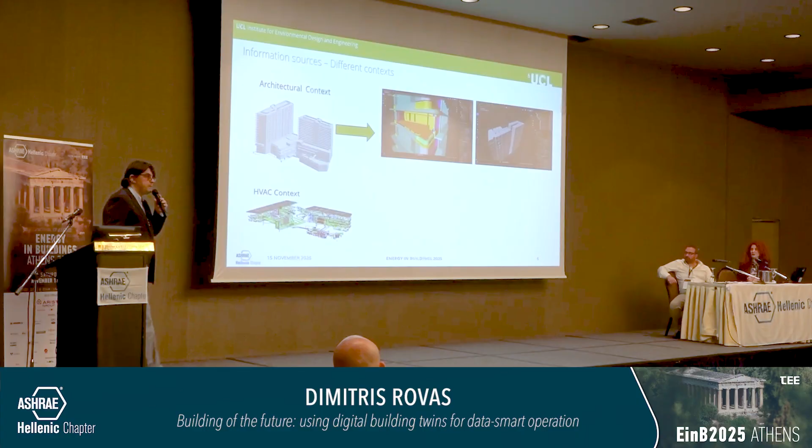If we look at the MEP side of things, a different perspective around the building, the heating and cooling context, this is part of that federated BIM model, and you can infer the complexity. Just looking at the bottom part, you can tell there's much more complexity, and all that complexity has to do with the contextual knowledge around how that building is working and operating.

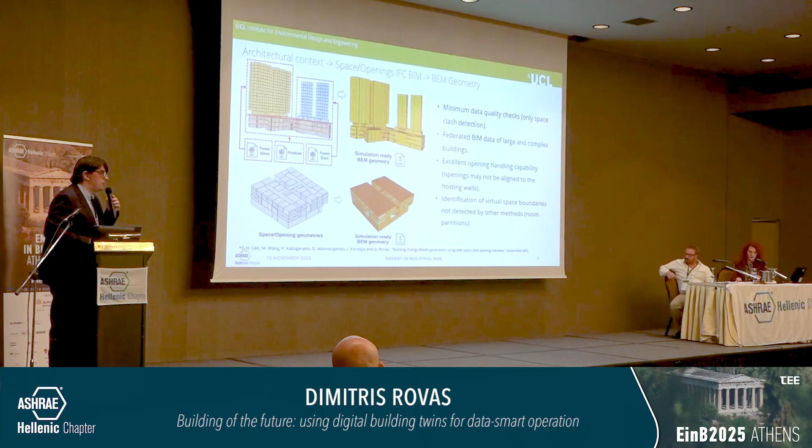In the real world, we always get this data, whether it's 2D drawings or building information models in more modern cases, or other types of data, and all this data are always going to be problematic. So what we have been working on are algorithms and tools that are robust to such uncertainties.

One proverbial case is around how we can generate and understand energy performance. The way we do that is we set up energy models. In early or later design stages, for example, there's an ASHRAE standard 209 that talks about different design stages, and there's a lot of discussion around how we use energy modeling. We need to create those models that are not correct, but represent our understanding and support not actual numbers, but a discussion and decision around how things are.

So the reason we create these artifacts is not models for the sake of models, but rather to help us understand how specific design decisions are made and what impact they have, and then drive the discussion between the different disciplines as a way of exploring that space and delivering solutions that are fit for purpose. So what we've been working on is around that question.

Can we accelerate that process and facilitate that discussion? Can we support fast engineering and re-engineering so that you can get responses around how your building is operating or how a specific design decision is going to be made? So we've been working on algorithms that automate that process, and the case of an energy model is one example, looking at the geometry.

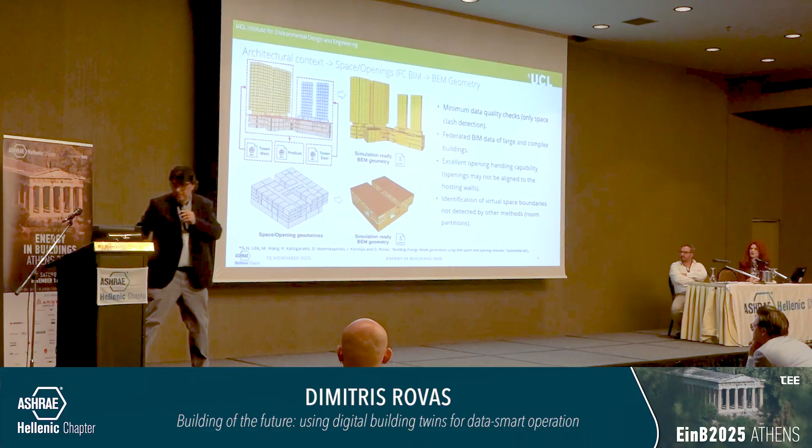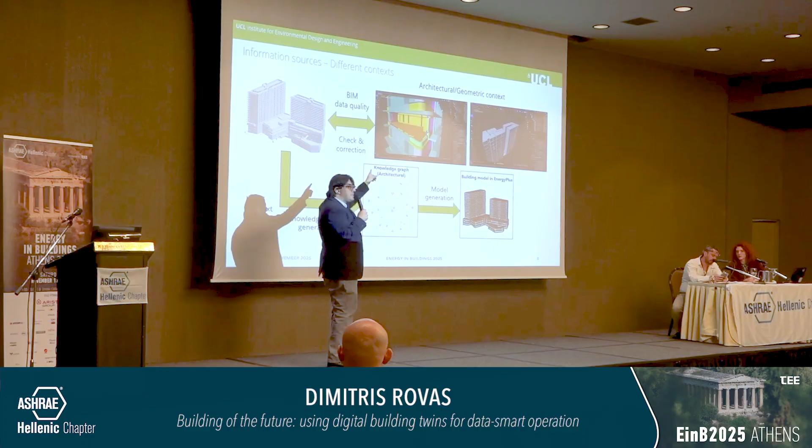Now, what becomes quite interesting in this case, and I'd argue in many cases, is that when we look at understanding energy flows between buildings, this is very much a topological issue. We need to know this space, what space is connected below, above, or next to us. And when we have something like a graph representation, I'll explain and show examples in a bit, it allows us to capture that complexity in a robust way.

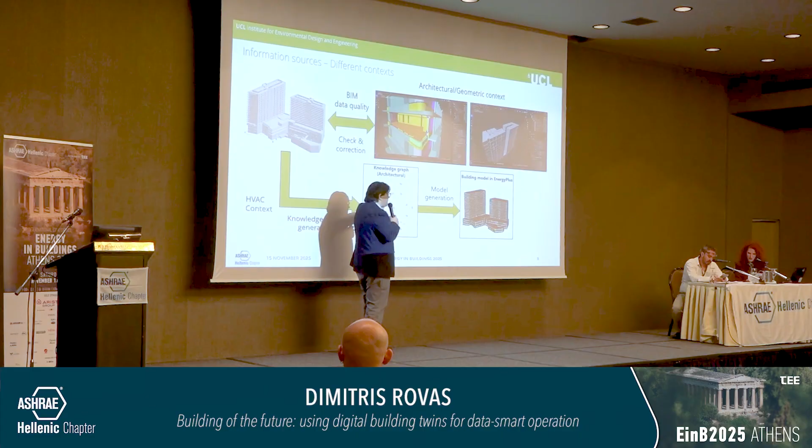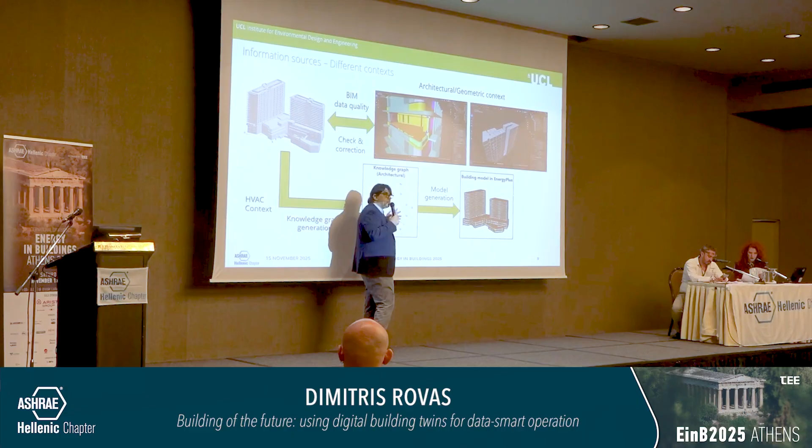So what I'm introducing here is some sort of representation, a knowledge graph, an ontology, and we're going to get to that, which allows us to capture how that building is connected. This is the fundamental information required so that we can generate energy models.

A second bit, which is equally important and relevant, and again academic work with quite a lot of implications, is how we can look at the different perspective. The heating and cooling side of things is a different world, but talking about the same context, the actual building itself, and how we can bring that information under the same umbrella to understand how we serve spaces and so on.

So what we have been looking at is developing different algorithms that automate the process from different inputs. In this particular case, this algorithm is taking building information modeling data, and then generating that connectivity that allows us to tell which terminal unit is connected and how connected to other systems. And then we can generate some sort of representation around that connectivity.

And the important bit is that representation is going to be very different for this building compared to the next one, but the structure of that representation can be exactly the same. So if we manage to do it for one building with a fixed structure, then we can do that for every building with any structure.

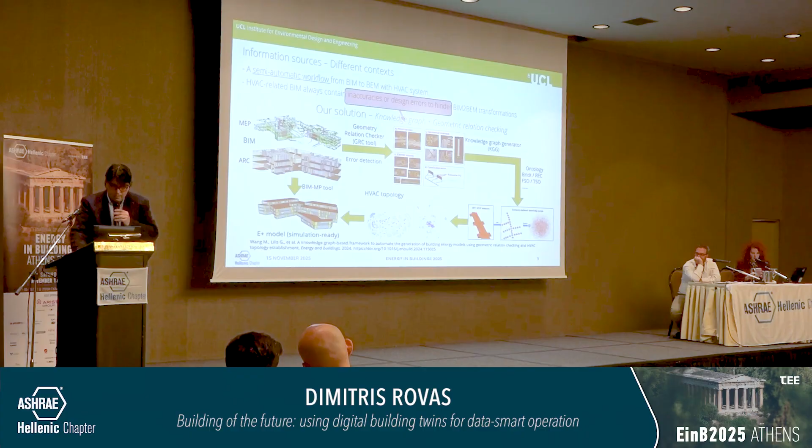So to highlight this, here's one example of that workflow, where we started from different building information models. It was a federated model, Bartlett, and then managed to generate automatically or semi-automatically the E+ model.

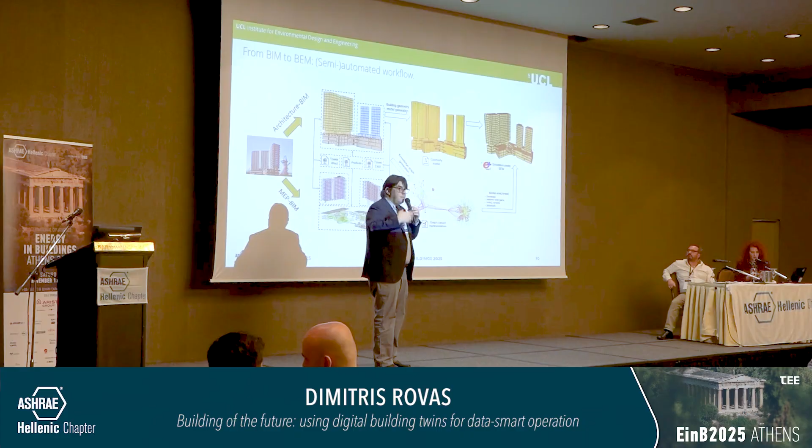You can run that model, give some results back to the user, and then if the user decides to change one parameter, operation or otherwise, you can regenerate that automatically, and there's not a lot of effort into doing that process, which usually takes quite a lot of time. You have very fast and very quick responses to that. So this is trying to automate that aspect.

But I think where it becomes much more important is when we go to operation, when we actually have data coming from different aspects. And then we have different stakeholders, and they have different requirements, different needs, and we need to serve their purpose. So what I've chosen to focus on is one of them.

And actually what I'm going to be talking about, we can change the context and the stakeholder, and we can demonstrate the same ideas, as was raised before, and understand that while they are looking at the building from their perspective, they have the same needs of understanding structures and using the data.

So these are ideas of questions that might be asked from the facility managers, which is the UCL Estates team. It is questions about resource utilization, it is about compliance, it is about resilience, it is about comfort, it is about energy use, it is about reporting KPIs for strategic decision making, and they have to work with different types of data: environmental data, access and occupancy data, utility data, and so on and so forth.

So the question is, how can we do that? And the way it happens now, there's a lot of value associated with data, so we didn't install 3,000 or 4,000 sensors in this building for nothing. But then accessing that information and finding useful information, getting signal from all that noise becomes very tricky, especially for people who are not trained to be able to do that.

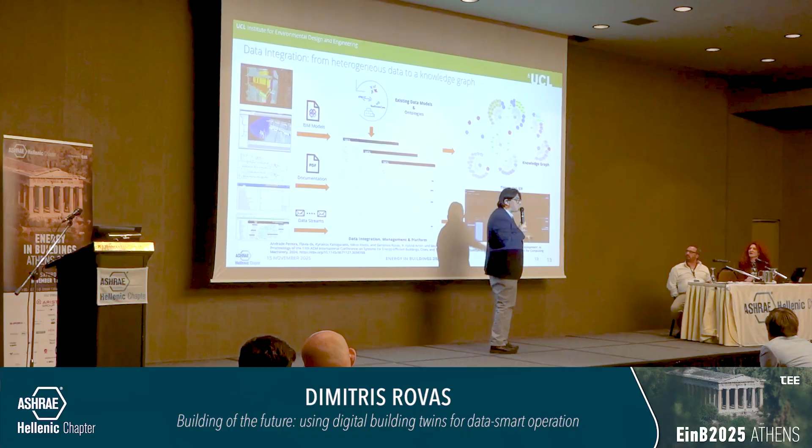And what our platform can do is generate some sort of representation, which is that knowledge graph that is based on ontology, an example of what was mentioned before. And that knowledge graph captures all the essential parts of what the building is about in a way that is queryable and discoverable by the different stakeholders and by different analytics.

So we can be running those processes, and then we can be collecting the data from the different assets. This can be a BMS system, this can be IoT sensors, this can be weather stations, this can be APIs, web services, whatever. So we have a very generic driver architecture that allows us to get this data and access this data, and then cross-reference those two things so that we can support decision making.

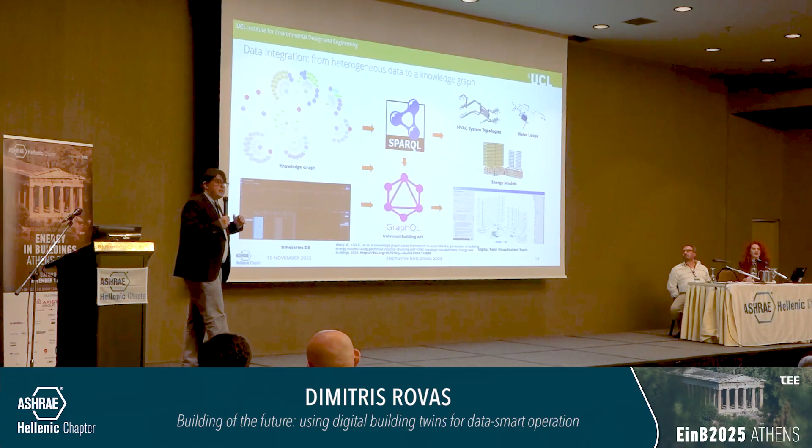The way that's done, and the way it should be done, is in a universal way. So that knowledge graph, that ontology, supports a representation that has a mutable structure, or a different structure. And so the way we should be able to expose those data to the outside world, which can be analytics, which can be AI, which can be users, is through a standard interface.

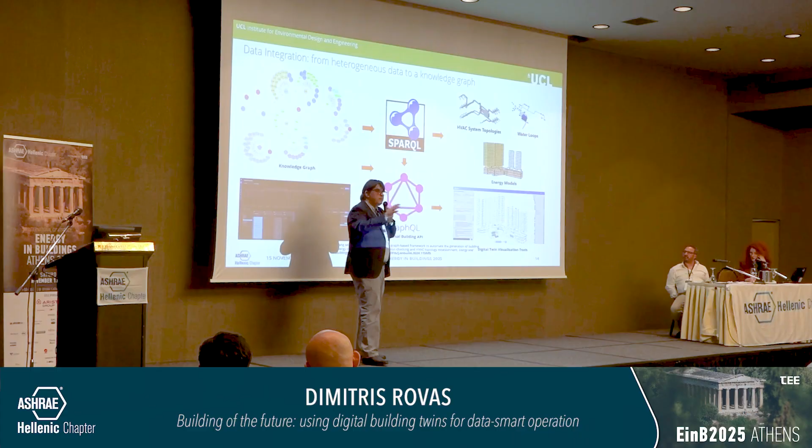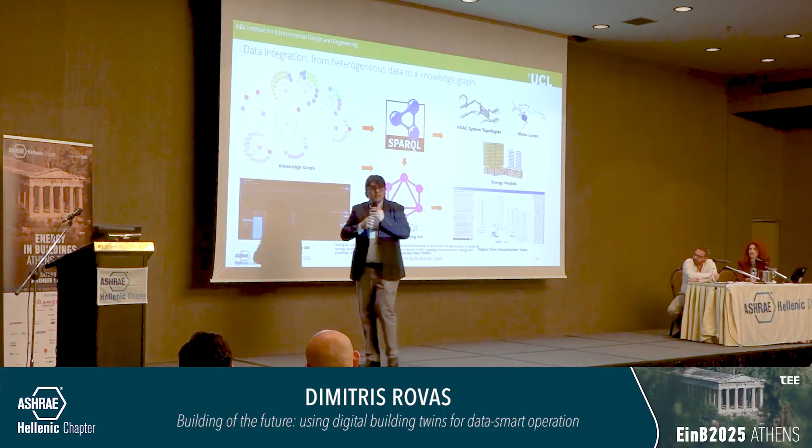I'm not going to go into the computer science bits, but using something called GraphQL, we can expose this information. You don't really need to know what building you're talking about. You can explore and ask questions around your data, and discover what the structure of the data is based on your ontology, and then access the relevant data using that API without understanding which building you're working on. And that is very important so as to deliver and separate and develop services.

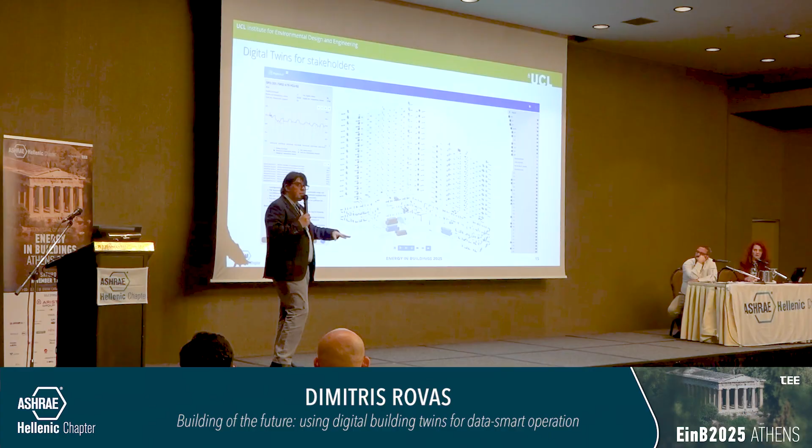So this is an example, and I'm going to show you - this is an academic example, but it's exactly the same idea as was mentioned before. The visualization context comes last and is not so important. It is important from a user perspective, but it is less important than the underlying data representation, which is based on these properties. So here's an example.

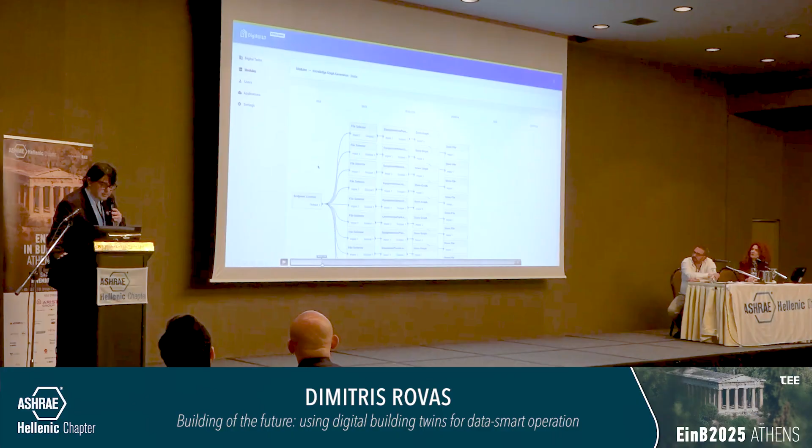So this is kind of how our platform looks, and it supports different data integration. But then this is what comes out - this is the graph of that building. There's a building, there's a level, there's a floor, there are spaces, there's a function unit, that function unit has points, and this structure is then fixed.

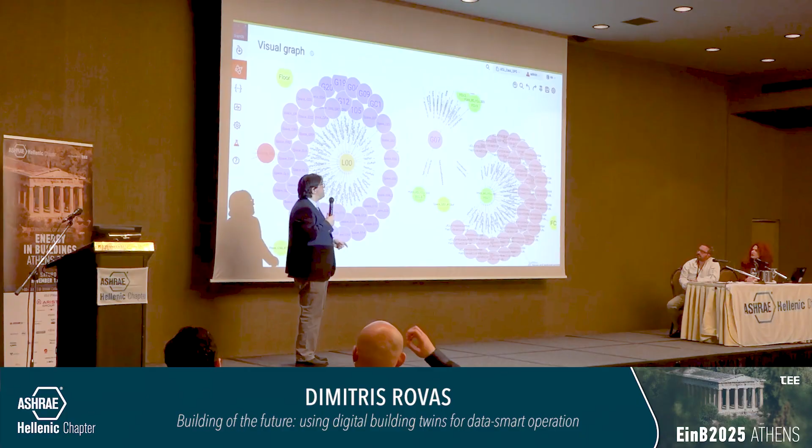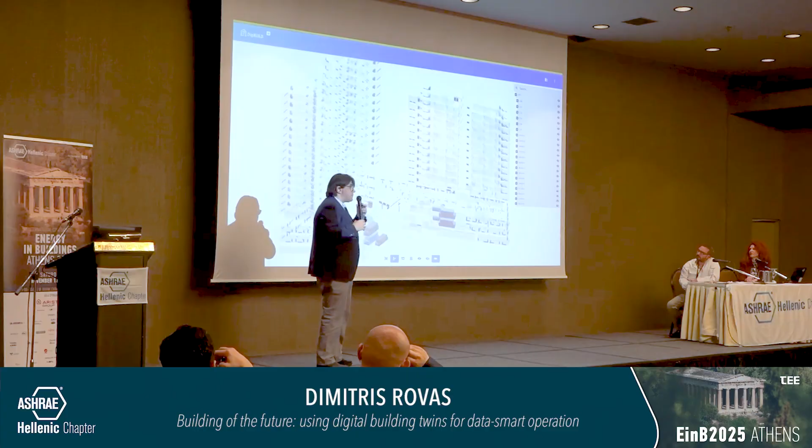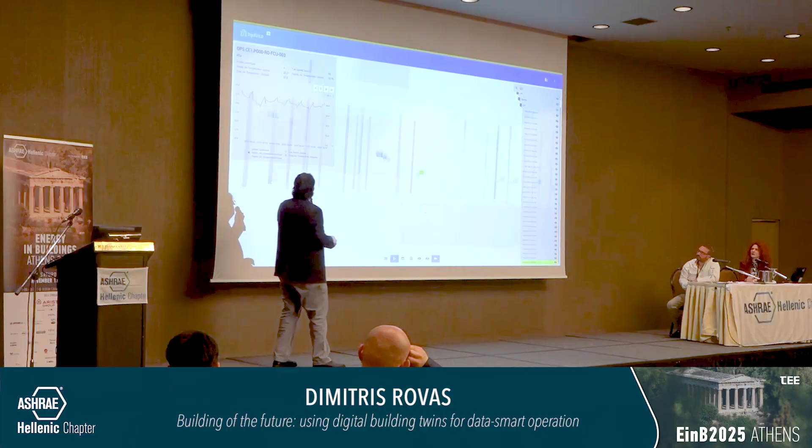What now becomes quite interesting, and this is just graphics - the back end is working based on the knowledge graph, that is based on the ontology - is that we can zoom in and understand exactly the relationships and how things are connected. So the graphics are not as impressive, but for example here, this is a case of the fan coil unit, and we're focusing on a specific fan coil unit.

And what you see here is the real-time data and historical data from the building. But what is more interesting is that we can take the local context and bring it into our LLMs. So our LLMs, for example, in this particular case, they're not just interpreting the data. We're really feeding the data, analysis, and analytics from the actual building, asset, and specific domain.

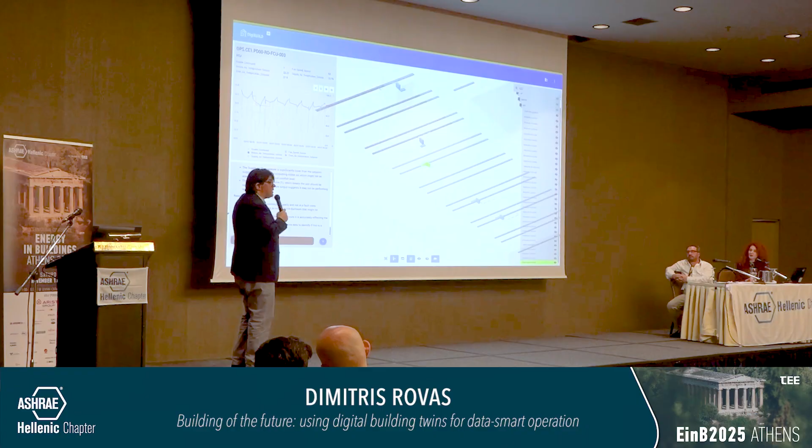So asking questions around how it's operating, asking questions around what we can do if there is a malfunction, if there is something else, and then getting answers that are specific to the specific role of the facility manager or the technician, or getting answers specific about that problematic asset.

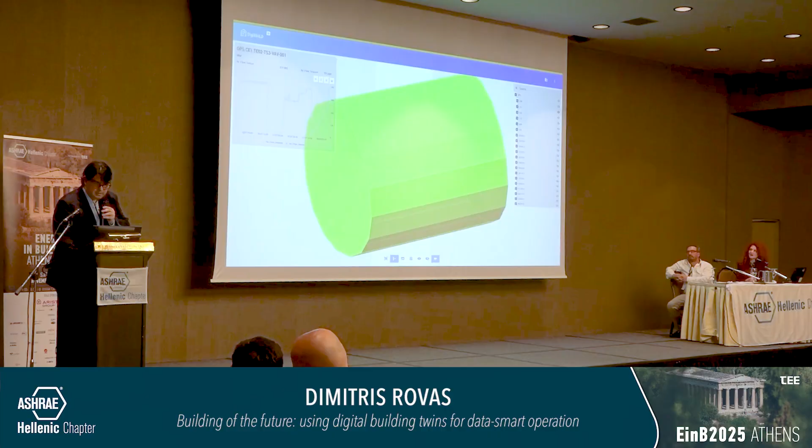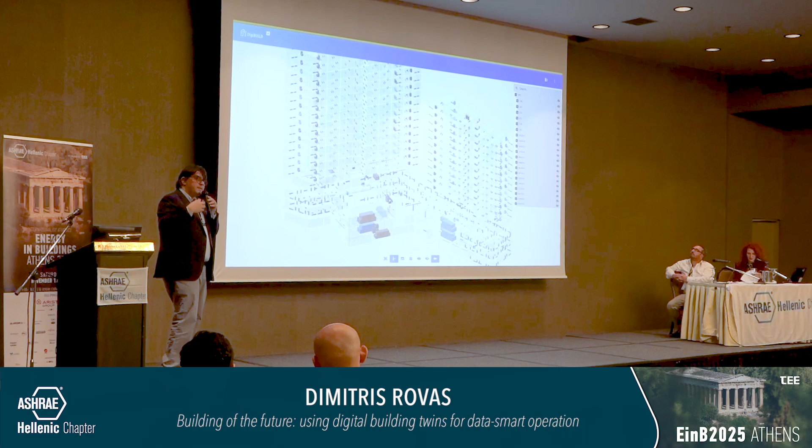So this is showcasing different examples. That was a fan coil unit, but we can be focusing on VAVs, and then again, a different set of analytics on the back end, different context on the back end, but through the graph and by querying, whenever somebody is clicking over there, we're exploring that hierarchy and then passing the right references, the right analysis tools, and then we can be exploring and asking questions around how our building is operating.

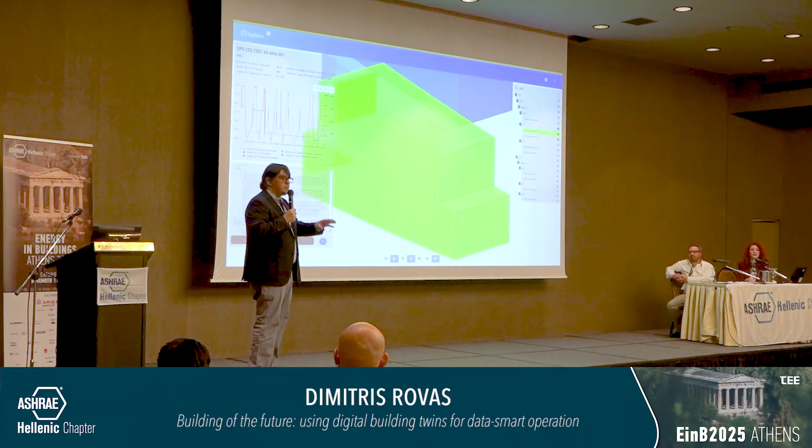And so what I hope that conveys is not a focus or fixation on technology, but it conveys the message that we need to be able to sustain these dialogues and provide owners and operators with the right tools. And we have tools that we didn't have 2 or 3 or 4 years ago. And we need to be able to make their life easier so that they can take better decisions, and these better decisions are actually going to make a difference and make our business better.